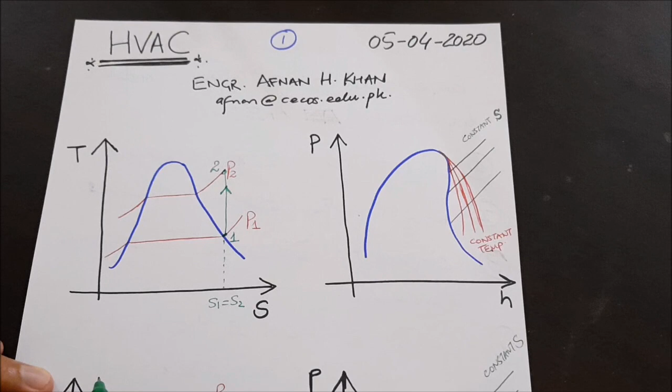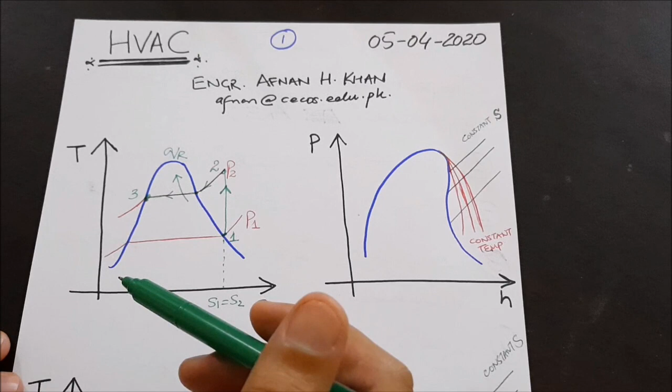Now further, the heat rejection in the condenser takes place. So from 2 to 3, the heat rejection from the condenser takes place. As you can see, the superheated vapor has been converted into a saturated liquid. From 3 to 4, the expansion valve comes in and the process of throttling occurs, and the process does not remain isentropic. In fact, it is isenthalpic expansion, shown from 3 to 4.

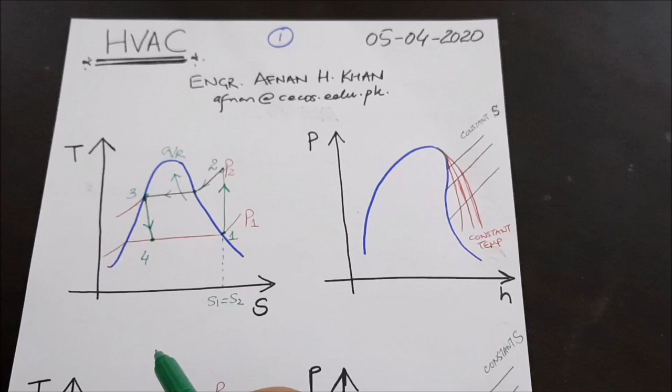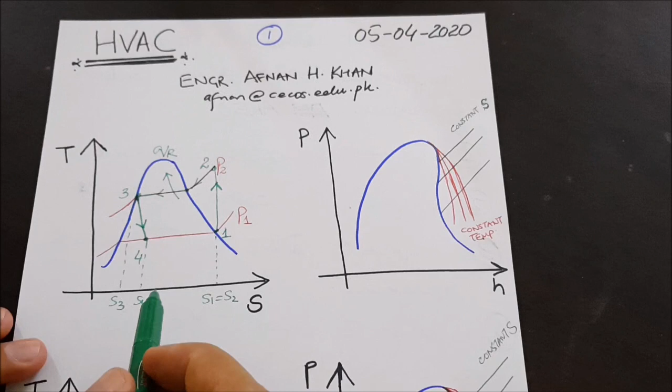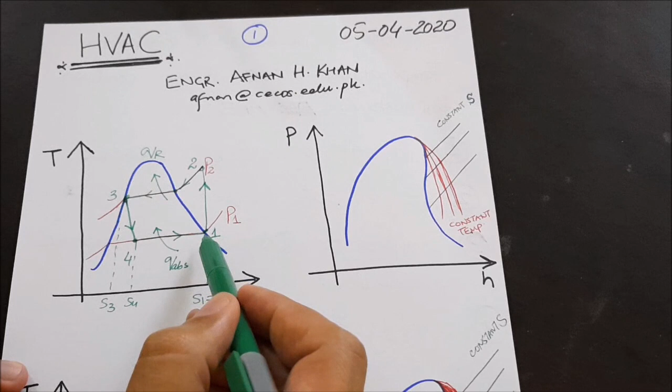So it means that the entropy has increased from 3, because at 3 the entropy was here, you can see S3, but at 4 the entropy has increased, though the process has been isenthalpic, which I will show on the pH curve. Then from 4 to 1, the process of evaporation takes place, and the heat is absorbed by the refrigerant, and a saturated vapor has been obtained at 1 ideally, because we are discussing the ideal vapor compression refrigeration cycle.

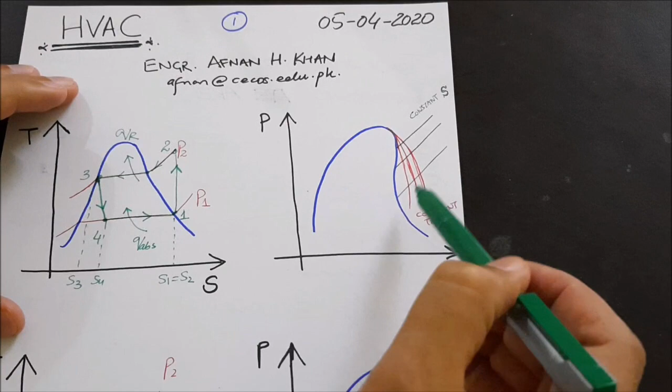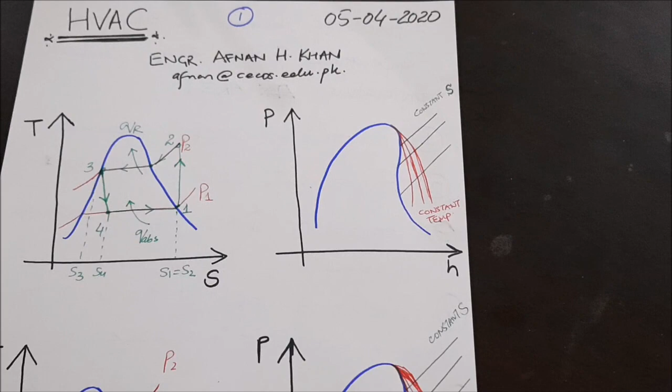Now what will happen on the pH curve? You can see that these black lines are actually the constant entropy lines. The isentropic processes would be shown on these lines. So from 1 to 2, as you can see the process is isentropic, and the black lines are showing the isentropic lines here. So from 1 to 2, basically the isentropic compression takes place.

From 2 to 3, as you can see there is a temperature drop, so the temperature would drop, but whatever is the pressure at 2 would be the pressure at 3, so it is an isobaric process, and the line remains horizontal and straight. So from 2 to 3 we have basically the heat rejection process, isobaric heat rejection, the condensation process takes place. Then from 3 to 4 the isenthalpic expansion takes place, and whatever is the enthalpy at 3 would be the enthalpy at 4, so H3 would be equal to H4. These are all the old points which we have discussed already.

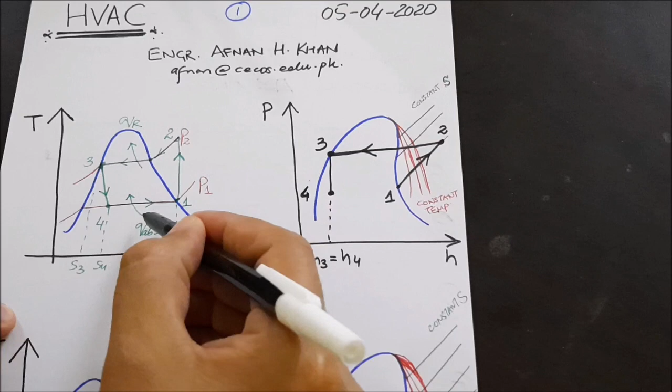Now from 4 to 1 the heat addition, again at constant pressure, the heat absorption takes place from 4 to 1 in the ideal vapor compression refrigeration cycle. So from 4 to 1 the evaporator is active, because the heat is being absorbed by the refrigerant, and over here the condensation process takes place because the heat is rejected. So from 2 to 3 the condensation process takes place, as you can see that from vapor it is converted into saturated liquid, from superheated vapor to saturated liquid, and from here a vapor-liquid mixture has been converted into saturated vapor ideally.

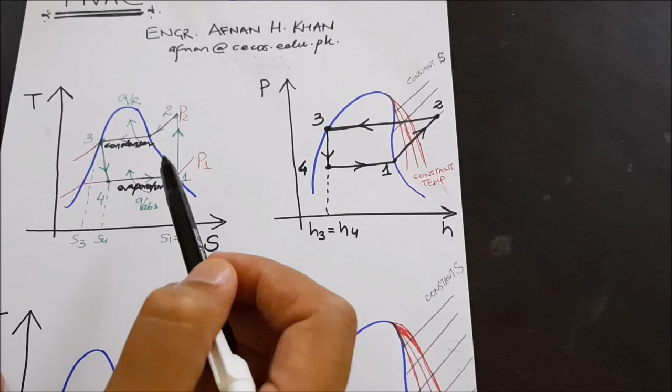Now this process or this cycle is actually in one stage. You can see that the evaporator and the condenser process, or the compression process, is taking place in one step.

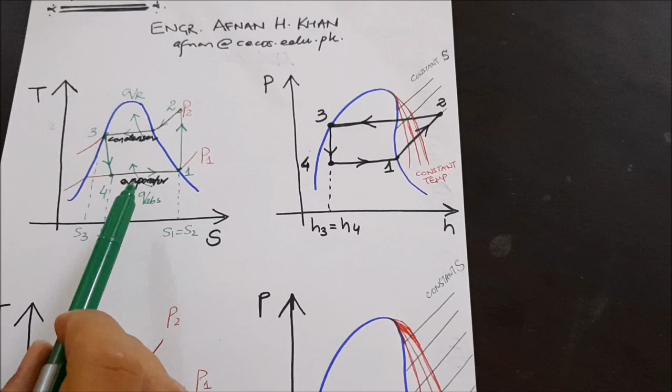But sometimes in most applications in the chemical, pharmaceutical, and food industries, particularly the dairy industry, we sometimes need this evaporator, the refrigerant, to evaporate at a very low temperature. For example, at minus 40 degrees Celsius, minus 50, minus 80, even sometimes minus 120, minus 100.

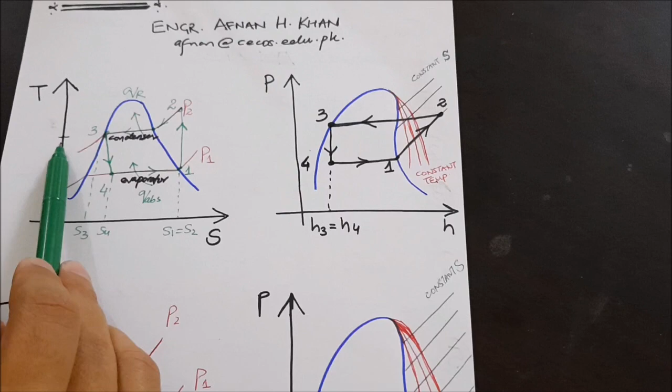So this temperature actually goes way below, and for a constant condensation temperature, first we assume that the condensation temperature is constant. So if we keep this temperature constant, whatever it is, if it remains the same, by reducing this evaporator temperature, the gap between this temperature and the evaporator temperature would increase.

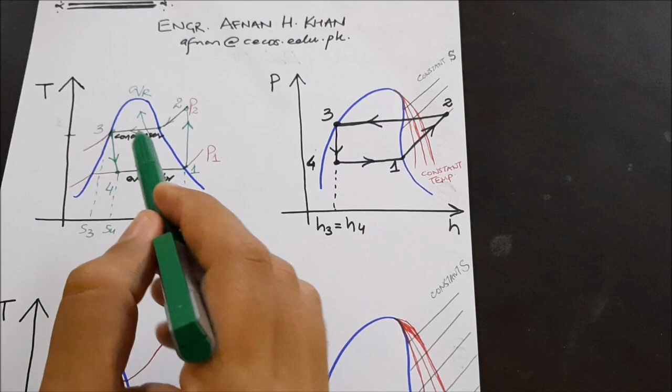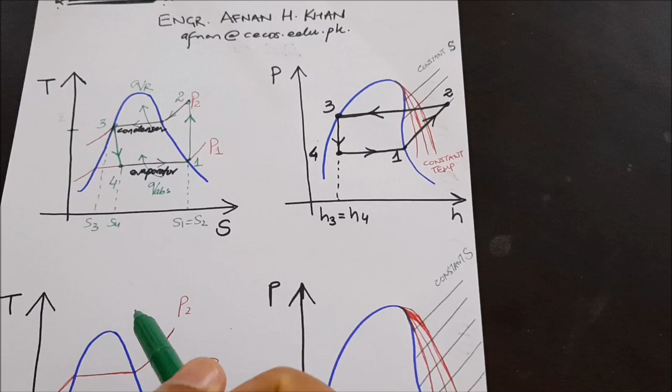So this gap is what we call the temperature lift. This lift actually increases the gap between the evaporator temperature and the condensation temperature. Now due to this, some problems arise. How? Let's move towards that.

Now again, these are the same T-S and P-H curves, and we are going to see the differences between these curves and how they behave when we reduce the evaporator temperature and continuously go on reducing it. So if you see in a T-S diagram, if we reduce this temperature, as you can see, T4, which is actually equal to T1, and T2, which is T3 basically.

So if we keep T3 the same as it was, and we actually reduce this temperature, so the temperature has been reduced, we are going bit by bit. For example, the temperature at point 4 has been shifted. Actually it was over here, as shown in the above figure, so actually it is over here, I'm drawing it. The actual position was here when the gap was the same, when there was T4.

Now if we increase this gap, it means we will need another curve, and the process would then come towards here, let's suppose like this, and then it will move like this and like this. I'm making it a bit... so now you can see what the problem is.

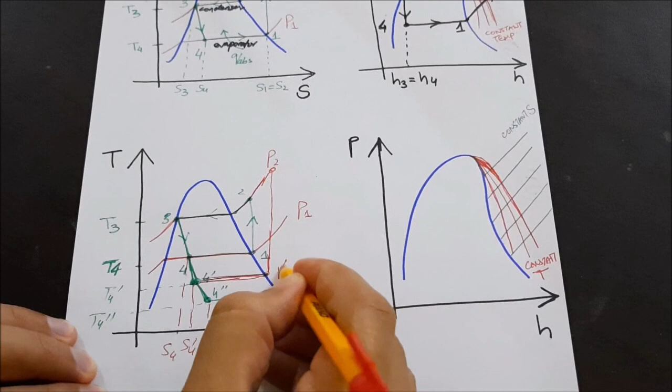Now when we reduce or lower the temperature of the evaporator, this is what happens: this is 1 dash and this is 2 dash. Now you can see that a quite big amount of compressive work is required. First the compression was from 1 to 2, but now when we reduce this temperature, a lot of work input is required. The compressor has to do a lot of work, and we need more energy and more operating time for the compressor to compress this saturated vapor into a superheated vapor.

And similarly, further reduction, you can see that it will further increase this temperature into 2 double dash, from 2 dash to 2 double dash. So you can see that the more we move down, the more the evaporator temperature goes down, the more you need the input work for the compressor.

This actually affects the efficiency of the cycle, because you are removing a small amount of heat, since most of this is already in a vapor state. So you are removing less heat from here, but giving more input work than what is actually being absorbed. So the point is that the efficiency has simply dropped.

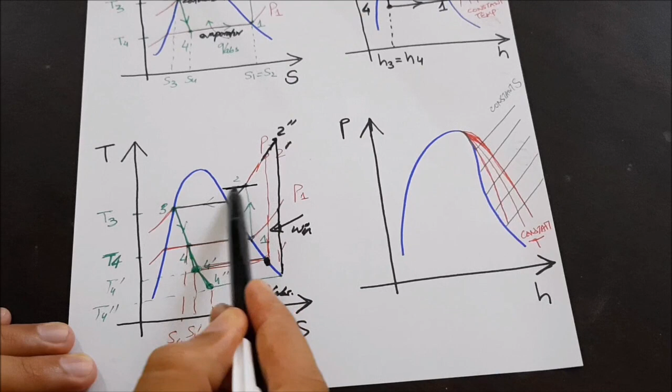Similarly, from this superheated steam, you can see that the temperature has been raised very high. First it was over here, but now the temperature has been raised over here.

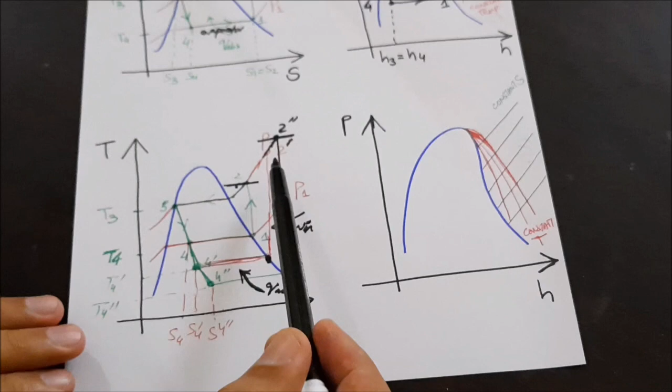So now we need a more efficient, sophisticated condenser to remove this heat and turn it into a saturated liquid. So it is quite difficult, and the efficiency has been dropped.

This means that this cycle in a single stage can work if the evaporator temperature is minus 30 or minus 40 degrees Celsius. But even for minus 40 degrees Celsius at times, the single stage ideal vapor compression refrigeration cycle does not work.

So we have to move towards other solutions. I can also show this on this curve. See, from 1 to 2 it was like this - that was the input to the compressor, going to the condenser.

But if we move downward, you can see that the work has increased. A lot of work is now needed: 1 double dash, 1 dash, 2 dash, 2 double dash. A lot of work is required if we move it to the same pressure, because we have to reach the same pressure curve, and the space is not enough.

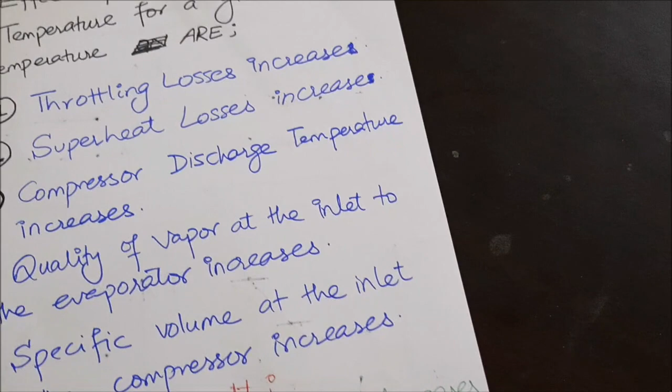Now the problem is how we can actually handle and overcome this problem. Let me tell you again what happens when we decrease the evaporator temperature for a given condenser temperature.

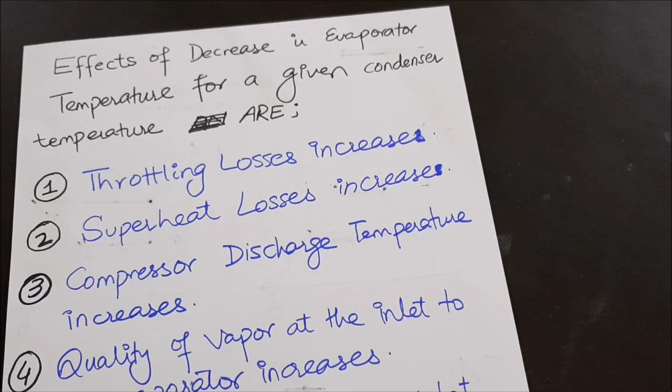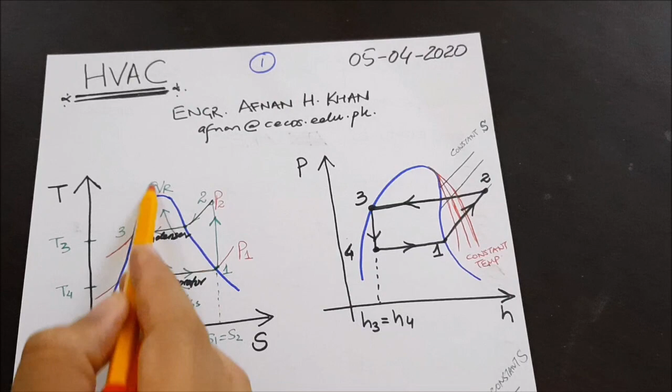We are not changing the given condenser temperature. The similar effect would be produced if we keep the evaporator temperature same and increase the condenser temperature instead - the same hurdles arise. If we keep that temperature same and increase this one, again the gap increases, and again the amount of required work would be greater.

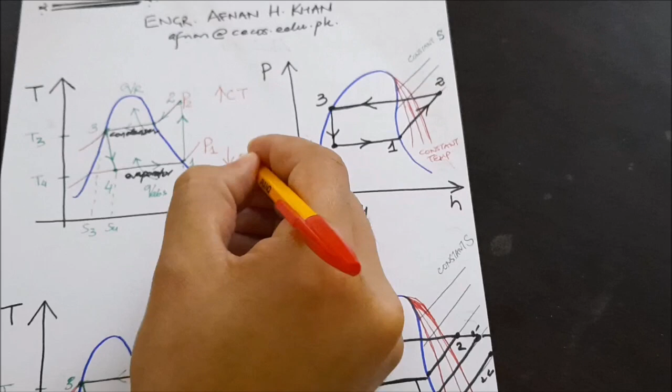So it is either way: either you keep the evaporator temperature same and the condenser temperature higher in certain applications, or you keep the condenser temperature constant and decrease the evaporator temperature. Either way, the gap increases between these two limits, and that is why the problem arises.

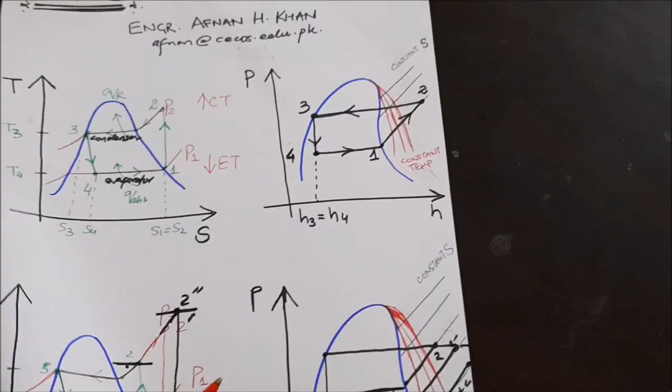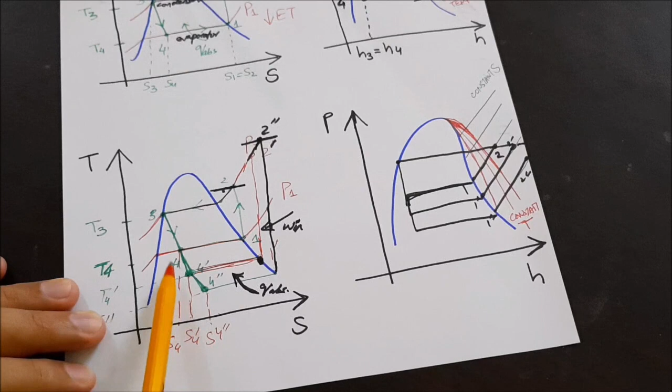Now what are the effects? The first effect is that the throttling losses increase. As I mentioned, as we move down, the throttling happens from 3 to 4. As the temperature is reduced, the entropy increases, which means the losses are increasing - so the throttling losses are actually increased.

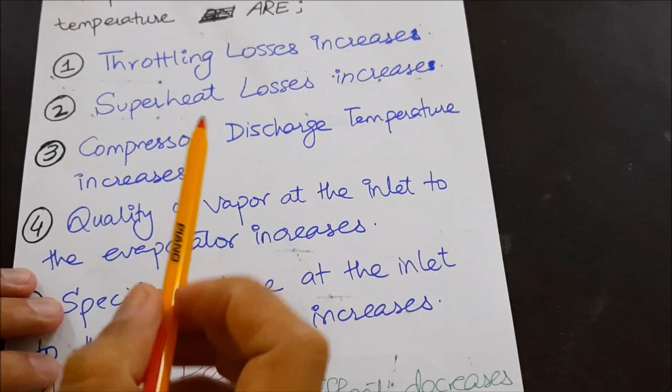Number two, superheat losses increase. Previously the temperature was here, but now the vapor becomes more superheated, and when this happens there are losses. The condensation would not take place efficiently and there would be losses. So from 2 double dash to 2 to 3 there would be immense losses, which are the superheated losses.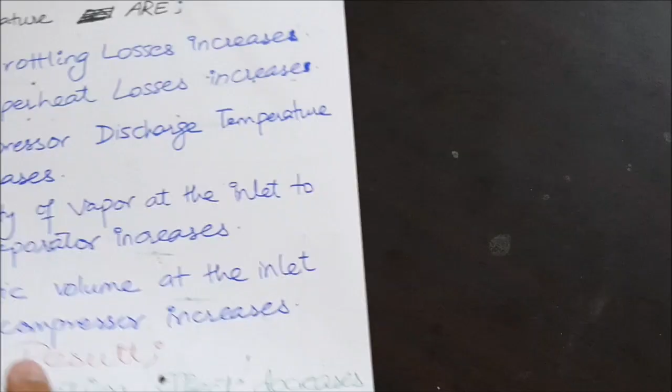The compressor discharge temperature increases. As you can see, the compression was taking place up to this temperature, but now as we move down, the temperature increases even more. The discharge temperature has been immensely increased, and we do not want that, because we want a relatively cool liquid to exit from the compressor, as it helps in the condensation process.

The fourth point is that the quality of vapor at the inlet of the evaporator increases. As shown, more quality of vapor has been introduced, which is not required. The problem is that the vapor at the inlet of the evaporator has a higher quality, which is not what we need.

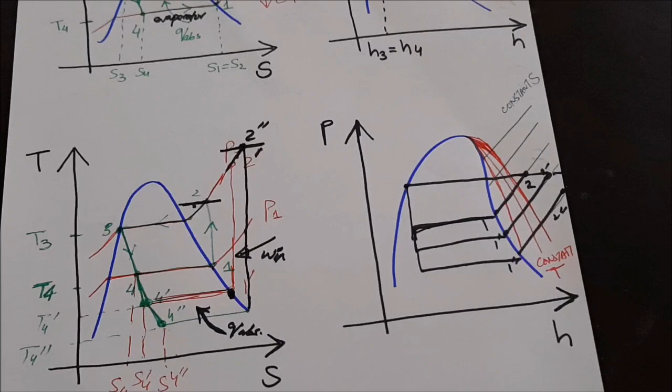At the evaporator we need a liquid in a saturated liquid state, so that it can absorb more heat and produce a greater cooling effect. If half of the condensed liquid is already in vapor form, then the efficiency of that cycle would be even less than half, because the work input has increased. So obviously the efficiency has been compromised.

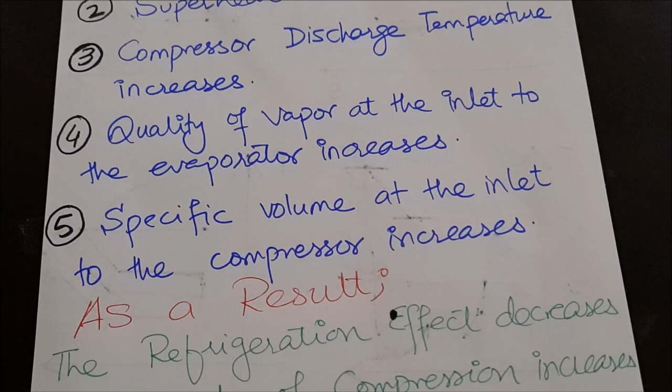Lastly, the specific volume at the inlet of the compressor increases. This is not required, because if the specific volume increases, the compressor has to do a lot more work. So it means that the specific volume has increased, and that is why it needs a lot of work to be done.

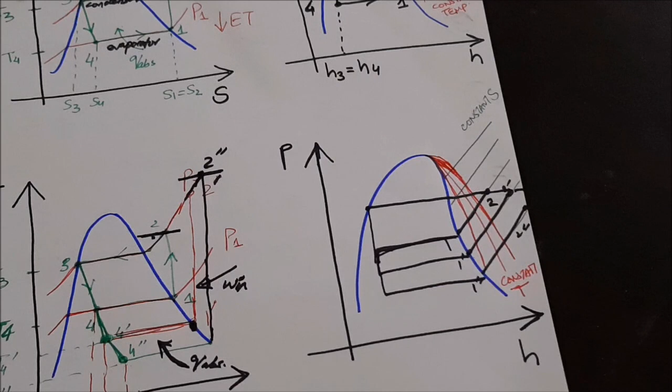So these are the drawbacks or effects of lowering the evaporator temperature, or keeping the evaporator temperature the same while moving the condenser temperature away — in both cases the gap increases. Even in a third case, if we move the condenser upward and the evaporator downward, the gap will again increase. If the gap increases, then single stage compression is of no use, or I would say not the best cycle for the refrigeration process.

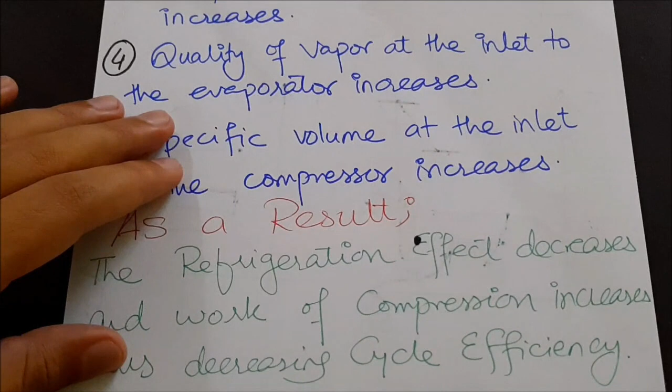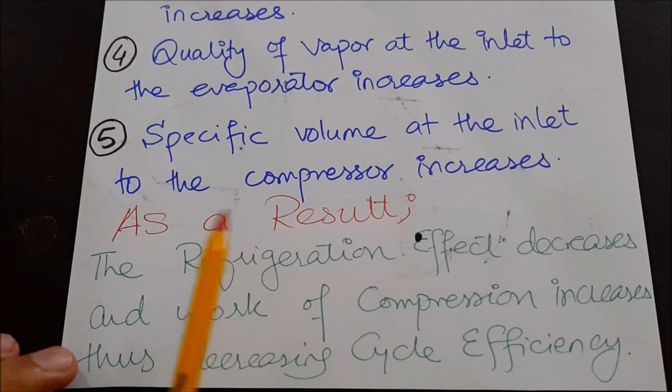So what happens as a result of all these things? The refrigeration effect decreases, because less heat is absorbed, and the work of compression increases, thus decreasing cycle efficiency. The work input of the compressor increases, and the heat absorption decreases, which is not what we want in a refrigeration process. We require that more heat is absorbed at the expense of less work input.

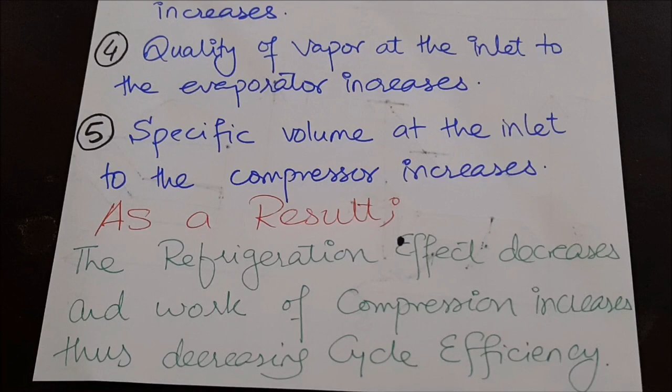So then what is the solution? Here comes the solution, and the solution is a multi-stage refrigeration system.

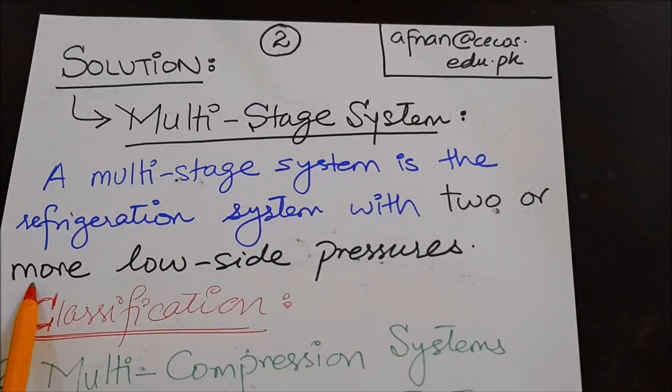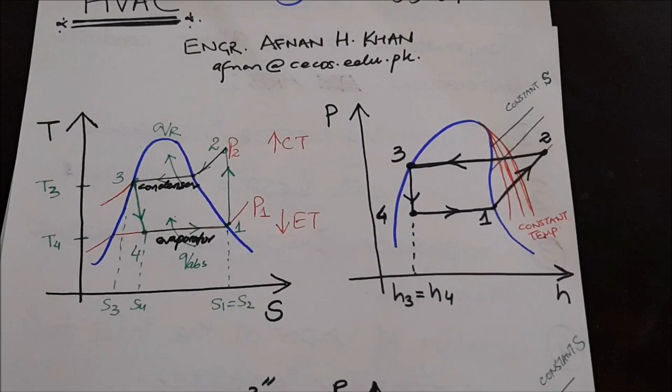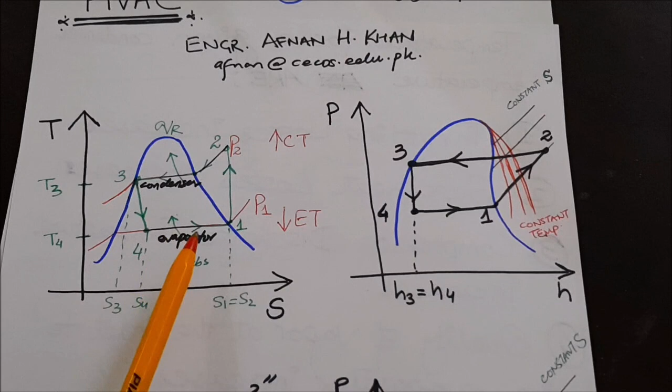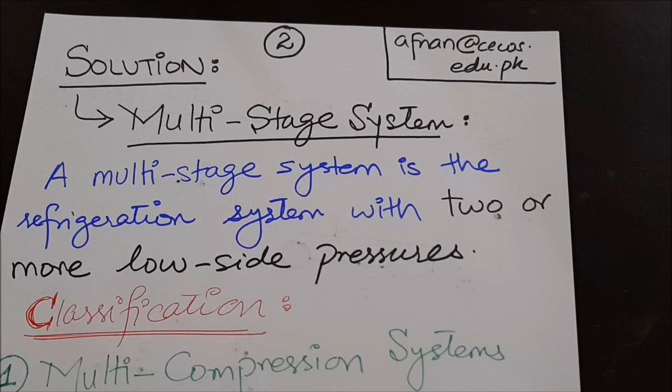A multi-stage system is a refrigeration system with two or more low side pressures. By low side pressures we mean the evaporator pressure, because as shown in this diagram, the evaporator is at a lower pressure while condensation takes place at a higher pressure. So when a particular system has two or more low pressures, that refrigeration system is called a multi-stage system. There could be different types of multi-stage systems.

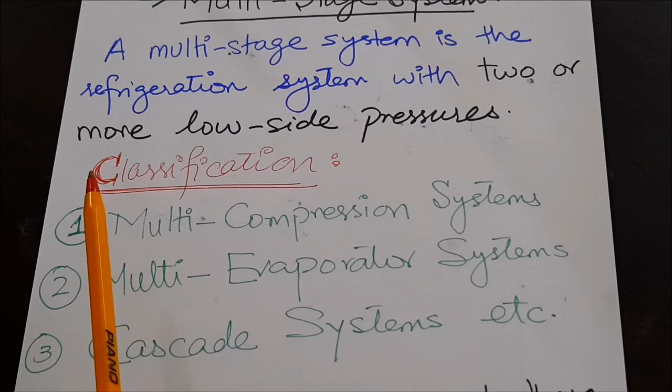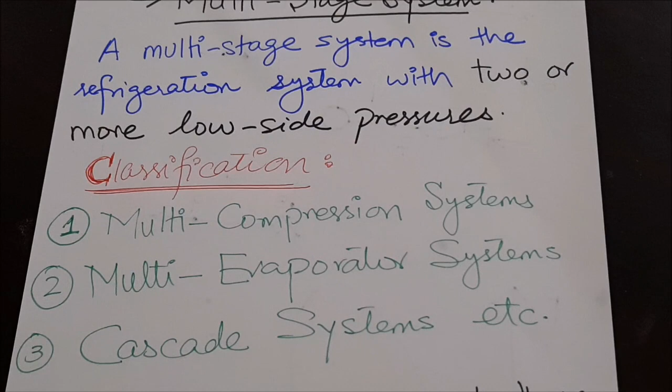We have used the classification of the multi-stage system. One is the multi-compression system, in which we do multiple compressions, which we will see in coming lectures. Then we have multi-evaporator systems, and the cascade systems, and so on. So we have different types of classification of the multi-stage system, because multi-staging can be in different processes - it can be in a compression process, an evaporation process, or even in the condensation system as well.

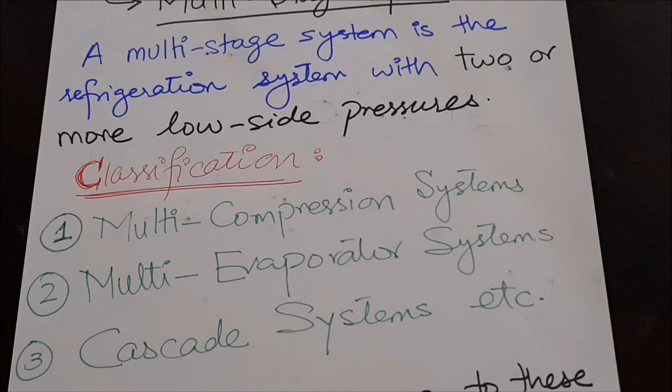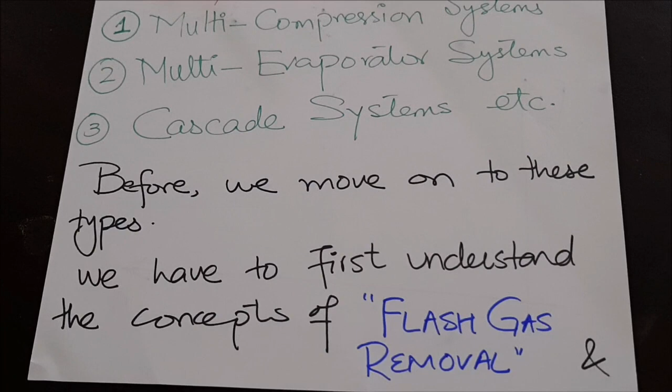So where we actually introduce the intercoolers and the intercooling processes. But before moving on, we have to discuss two things: the flash gas removal and the intercooling process, before going on into all these processes which we have mentioned.

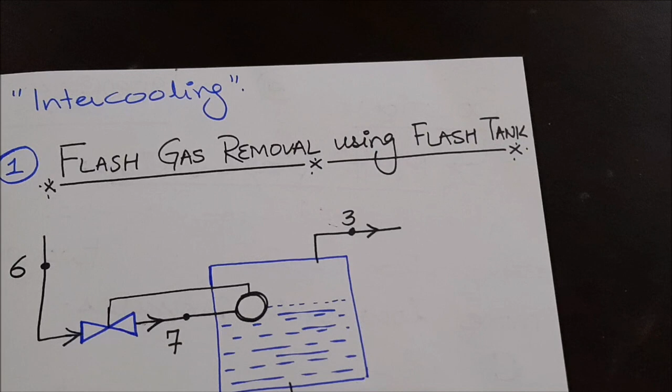So in today's lecture I am going to focus on the flash gas removal using a flash tank, and then the intercooler will be discussed in the next lecture inshallah, and then we will move on to how the multi-stage actually works. This lecture is going to be in different parts, so we are going to move in bits and cover this because it would be a bit complex for you guys to understand in one go. So you have to go through my lectures again and again so that you can understand what is going on. Now, what is flash gas removal and how does the flash tank work, and why is it important to remove it using the flash tank.

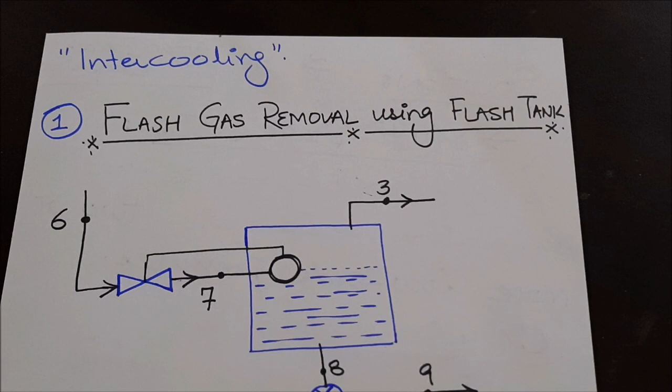Now what happens is that when the liquid comes from the condenser, it is actually not fully condensed, so it has some vapor in it. Now we have to remove that vapor because it would make it difficult for the compressor to compress a liquid-vapor mixture, as we have already discussed. So we need a vapor state for the compressor to compress. So we have to remove that gas or vapor.

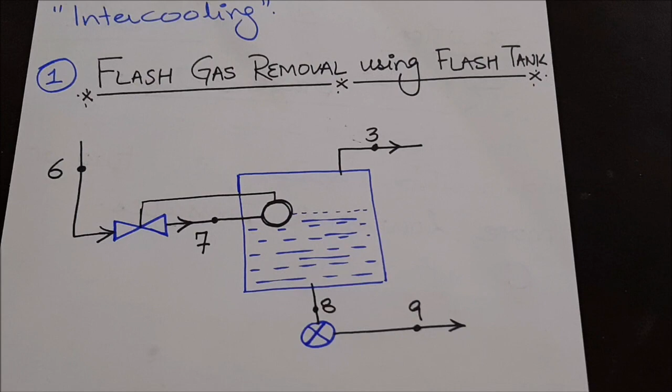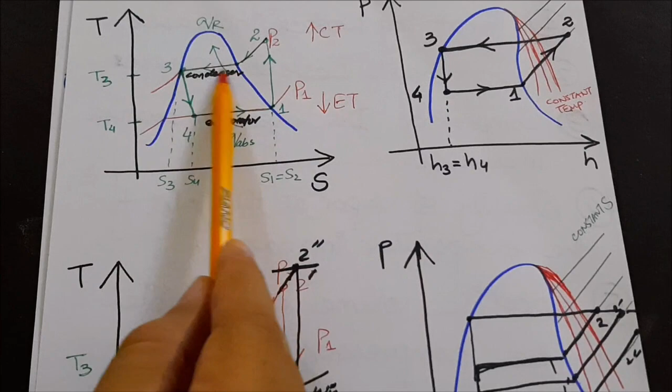Let me show you over here. As you can see, it is a mixture. So we have to remove that vapor which comes from the condenser or from the throttling process, the vapor that remains during the condensation process. As we all know, 100% condensation in one stage or one go is difficult when the temperature gap or temperature lift is very high, as I have mentioned. So in that case we need a flash tank.

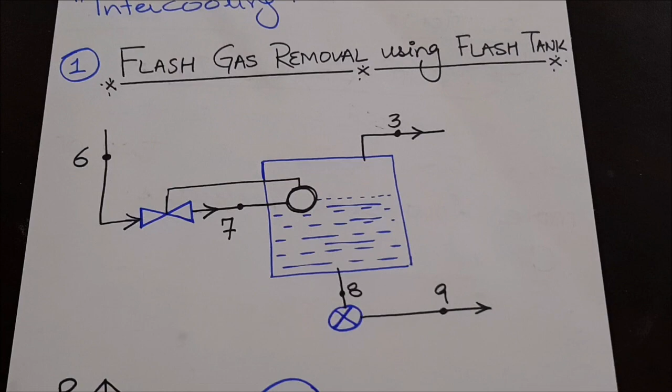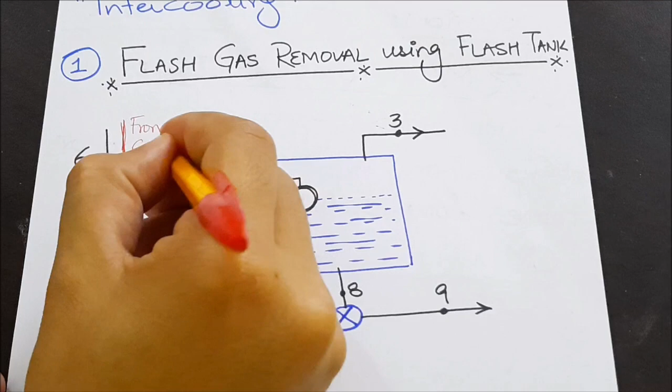Now let's see how the flash tank works and what happens in it. I've just named the points 6, 7, 3, 8 and 9. As you can see, from point 6 the liquid comes from the condenser. So from the condenser, the liquid comes and it has a mixture of both liquid as well as gas. So we have to remove that gas.

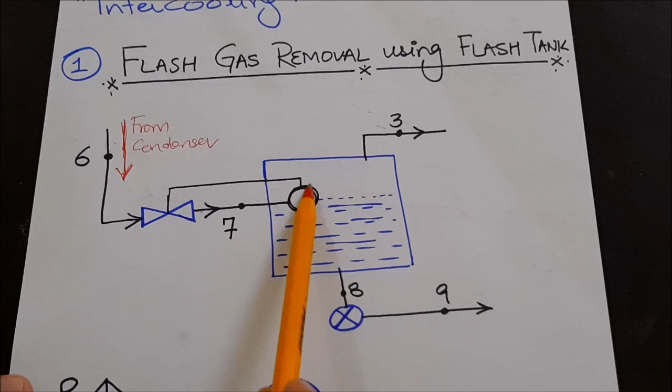Now what happens is that this is a floating valve. When this level decreases, the valve gets open, the mixture comes in, and when the tank becomes full, the valve closes, and remember, the expansion takes place. So when the expansion takes place, the liquid comes in over here and the vapor moves through this valve in the upward direction, towards the compressor, because the vapor has not been compressed 100%.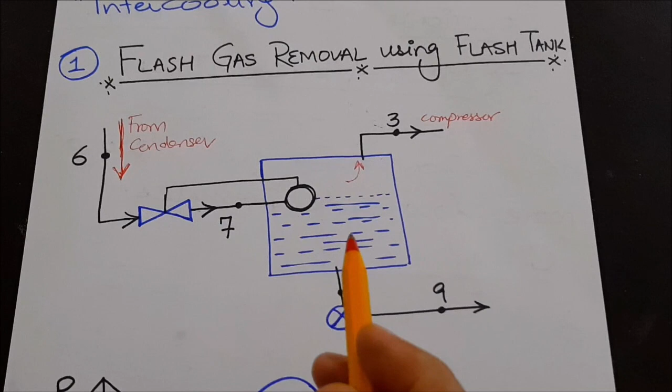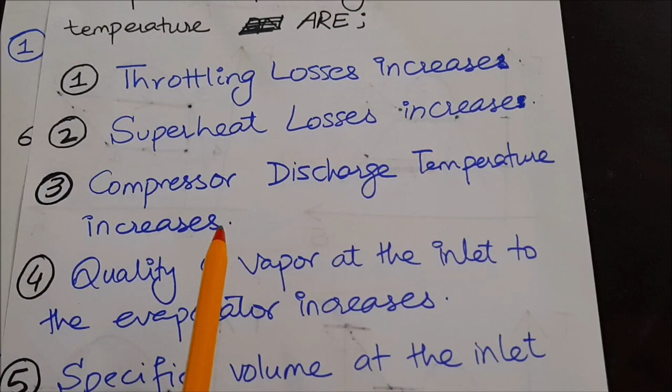So we need a liquid at the evaporator. As I have mentioned already, we do not require high quality vapor at the inlet of the evaporator - we need a high quality liquid at the input of the evaporator. That is why we send this vapor to the compressor, in order to compress it again and make sure that the vapor is being converted into liquid.

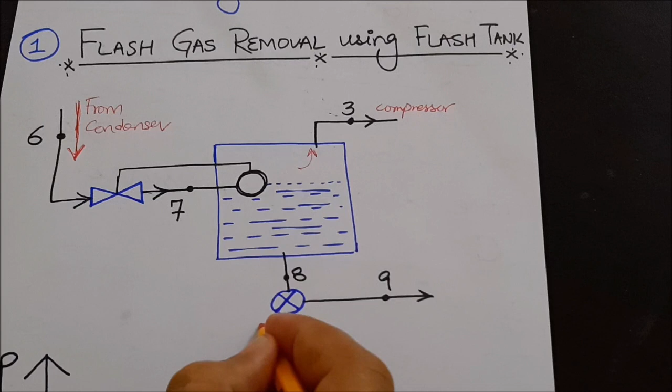And then from here the liquid is actually expanded through an expansion valve. The liquid further expands, and upon expansion the temperature further reduces, and then it moves to the evaporator.

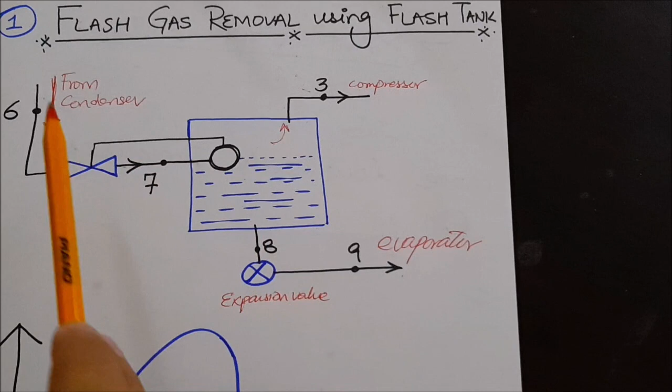Now as you can see the problem has been solved: the liquid, which was actually a mixture of liquid and vapor coming from the condenser, has had its vapor separated and moved towards the compressor, while the liquid has been expanded into the evaporator. Now the refrigerant entering the evaporator is a saturated liquid, not a vapor, not a mixture of vapor. That is how the flash tank works.

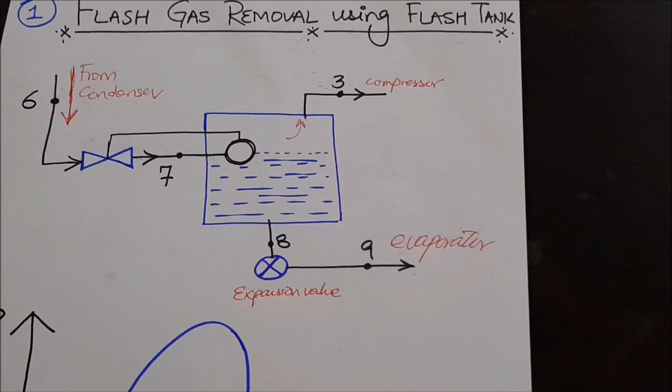The flash gases form upon the expansion from the condenser through this expansion process. So we have to introduce a flash tank in between in order to remove the flash gases, because upon the flash, some of the particles get into the vapor state. We have to remove that vapor or gaseous refrigerant and then send it back to the compressor.

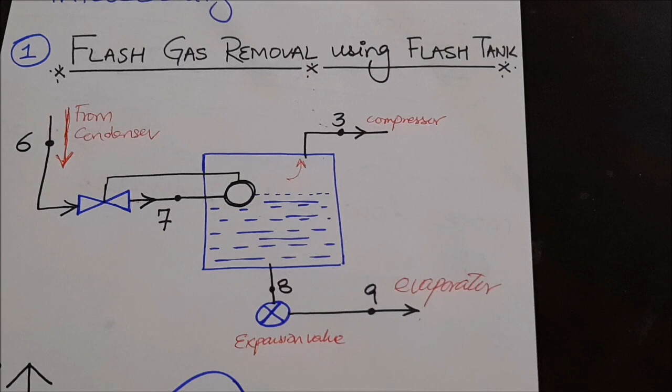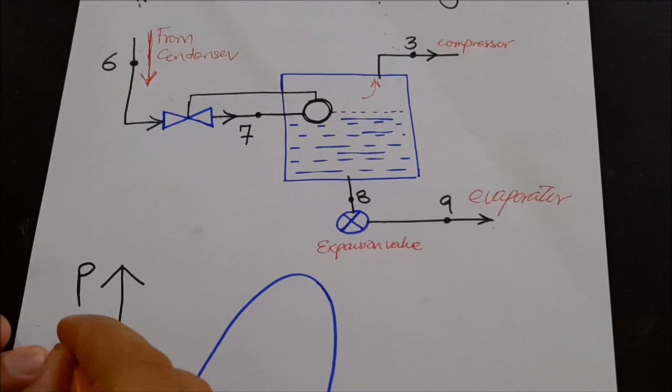Now let me show you the p-h diagram for this scenario of the flash tank or flash gas removal. At point 6, this is the pressure from the condenser, so here is P condenser. You can see that at point 6 we have a saturated liquid.

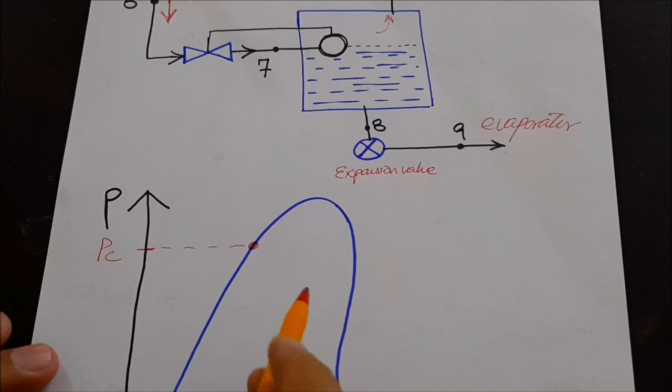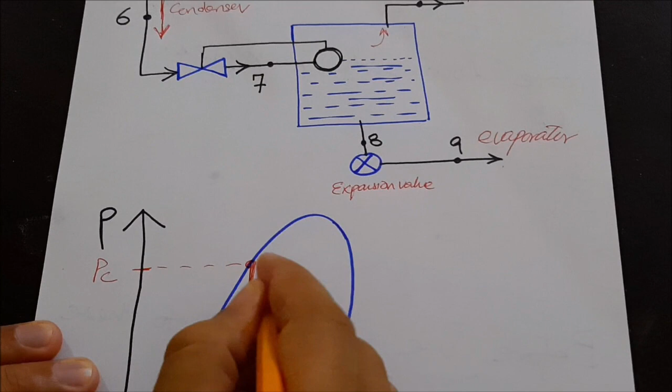Upon expansion from 6 to 7, as I said, flash takes place, and due to that flash some of the saturated liquid converts into gas. You can see that from 6 to 7 there is a pressure drop due to the expansion. This is 6, this is 7. So from 6 to 7 there is an expansion, and due to this expansion there is a pressure drop, and now the pressure is at P7.

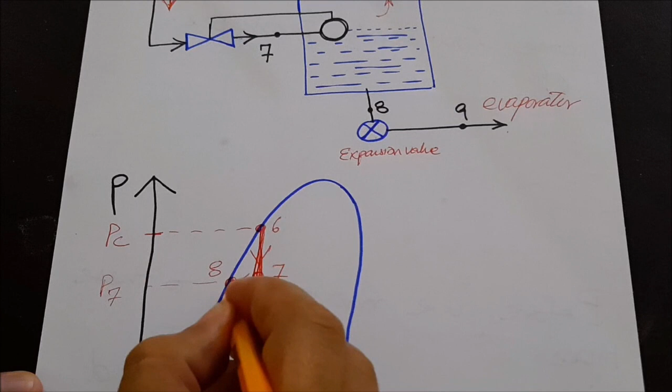This pressure will be the same as whatever the pressure is at 8, because after this the pressure is not going to change. So from 7 to 8 there would be a liquid state, saturated liquid. From 8 to 9 there will again be an expansion, because there is another expansion valve.

At 9 the pressure is further lower, P9. You can see that from 6 to 7 and then from 7 to 8 there is a liquid, saturated liquid, and from 8 to 9 there is again an expansion. The mixture that was present initially has been reduced, so the vapor content has been reduced further, with liquid and vapor generated due to this expansion.

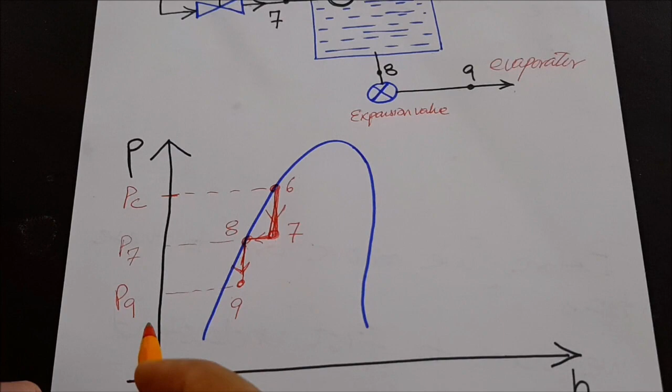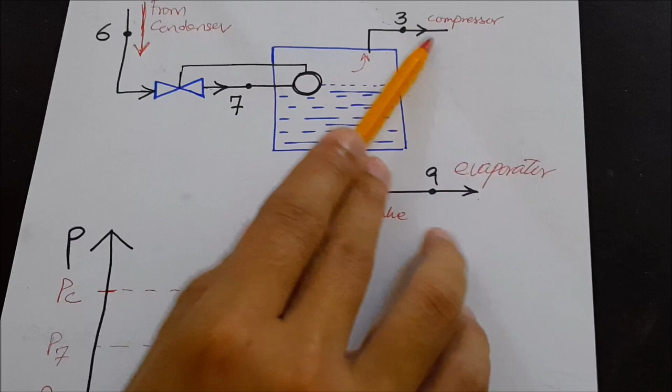Now what happens from 7? Two things are going to happen from 7. One, the saturated vapor has arisen and a saturated liquid has arisen at 8. So at 3 we have a saturated vapor which has been moved to the compressor. So from 7 it moves towards 3 as well.

So from 7 we move towards 3 and 8, where the saturated vapor at 3 undergoes compression, as you can see. And from 7 to 8, the saturated liquid, upon expansion, moves further in this direction, which we will discuss in detail under multi-stage compression.

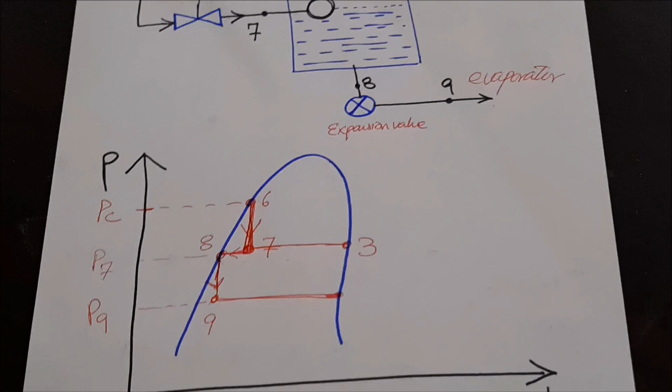So this is how the process takes place, and this is how the flash gases can be removed by the flash tank.

Now the second process we will study is intercoolers or the intercooling process, how that takes place and what the effects of intercooling are and why we need it. For now it might be a bit difficult to understand since we haven't combined these in a problem yet, as we're studying them separately. When we discuss flash gas removal using the flash tank and then intercooling, and combine them in a single problem, it will be easy to understand how they work together to improve the efficiency of the multi-stage vapor compression refrigeration cycle.